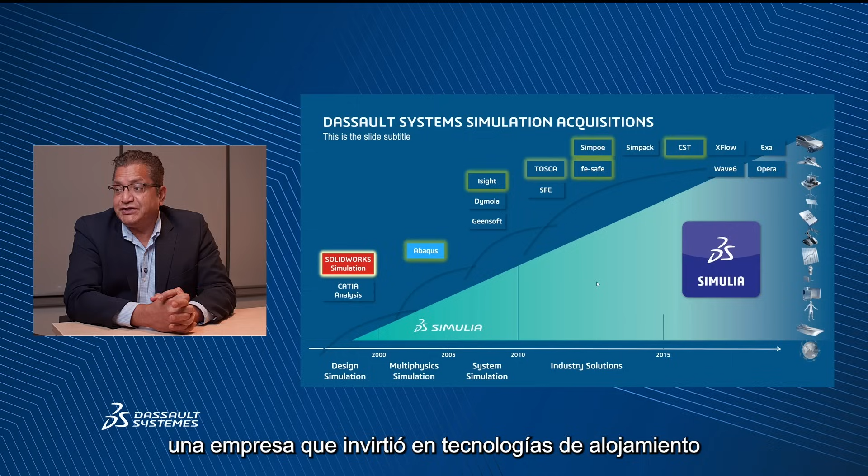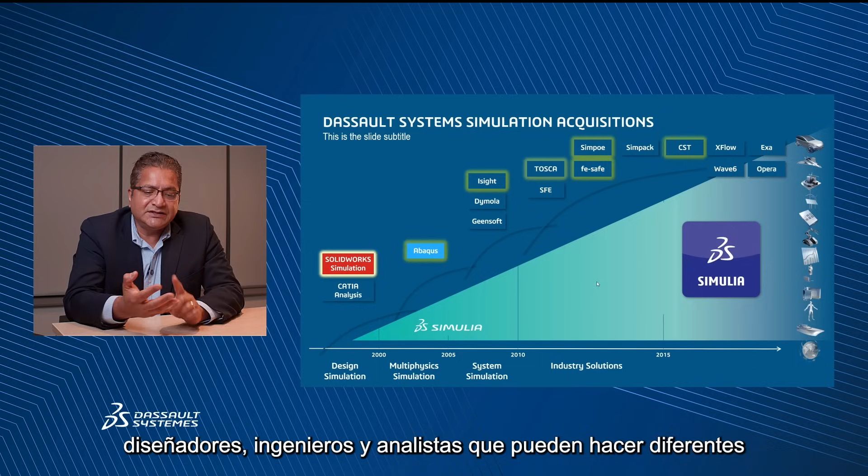If you look at how Dassault Systèmes as a company has invested in acquisitions of simulation technology over the years, it started all with SolidWorks Simulation, CATIA Analysis back in the year 2000, or even before that. The whole idea was to offer designer level simulation to the CAD base. But over the years, there have been several key acquisitions, such as Abaqus and CST Studio, and the goal was to offer not just designer level simulation, but multi-physics, multi-scalable system level simulations for all user personas, so designers, engineers, and analysts can do the different types of simulations to get the job done.

Now, if you break down our simulation portfolio, it really falls into three simple buckets. The first one is the SolidWorks desktop simulation portfolio, which is geared towards addressing the needs of designers and engineers. With this portfolio, you can solve physics such as motion, rigid body kinematics and dynamics, structural simulation, computational fluid dynamics, and plastics injection molding simulation softwares.

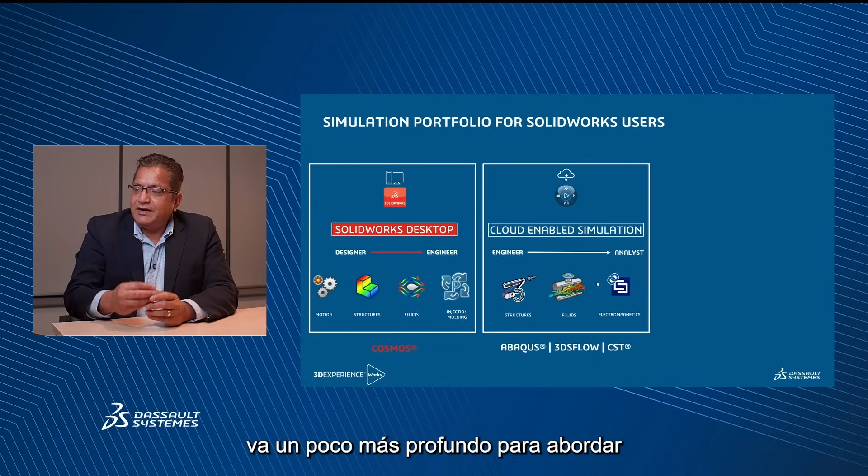We also have the desktop, SIMULIA Desktop, which is Abaqus CAE and CST Studio Suite. So again, if cloud is not an option, you can always access the same technology available on the SIMULIA desktop portfolio.

Let's take a look at SolidWorks Desktop, what it can do real quickly, what it means for designers and engineers to be using SolidWorks simulation.

Now, the first thing is to understand that there are two pillars of SolidWorks Desktop simulation. One is the integration with CAD, which allows you to design and simulate side by side. The other is to actually do design space exploration. As a designer or engineer, you're using SolidWorks to create your designs, but at the same time, you're tasked with getting to the optimal design as quickly as possible.

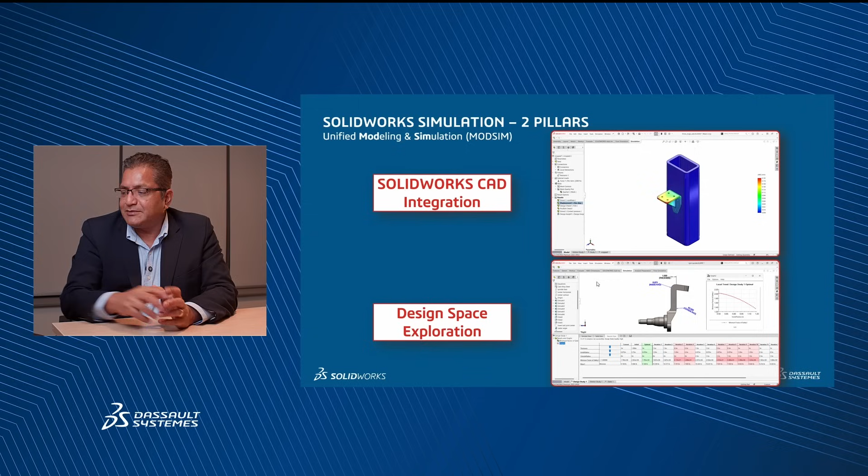So design space exploration, in terms of using optimization tools, can really automate your design iteration process and help you get from a baseline to an optimal design as quickly as possible. Now, these two pillars together help answer that fundamental question: how do we know that we have the best design?

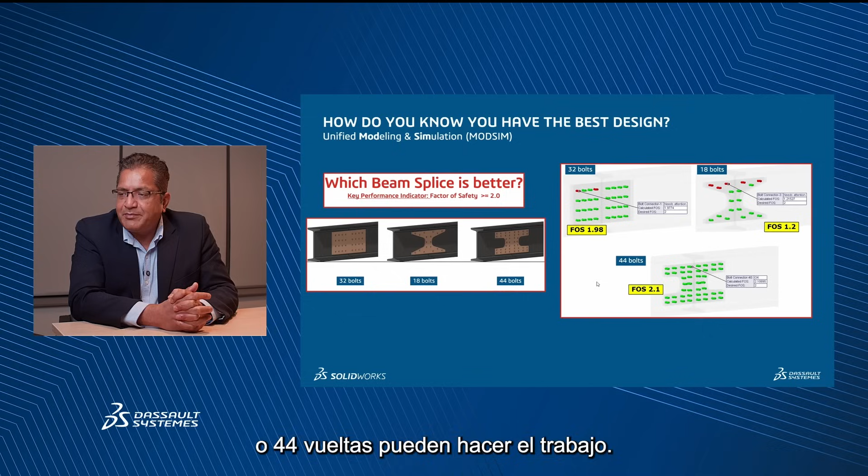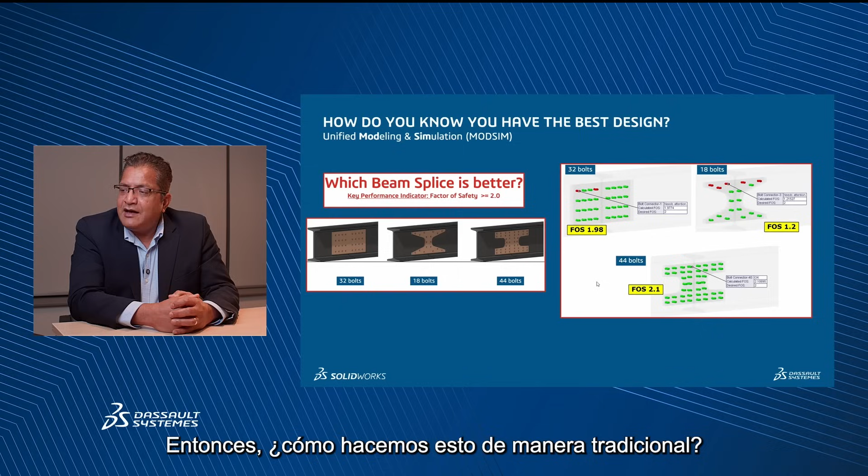So let's take a look at a few examples. This is SolidWorks simulation, an example for beam splice. How do you know, for example, whether 32 bolts, 18 bolts, or 44 bolts can get the job done? Everything's based on a certain criteria we are after. In this case, we're looking at a factor of safety greater than 2.0 in each bolt. So how do we go about doing this in a traditional way?

We would actually make a prototype and test if 32, 18, or 44 bolts will work as expected. But with simulation, we can get the same answers virtually, without making even a single prototype. That's where the beauty of simulation is. In this case, the image on the right shows that the 44 bolt configuration is the one that actually gets the job done, where the factor of safety in each bolt is at least 2.1.

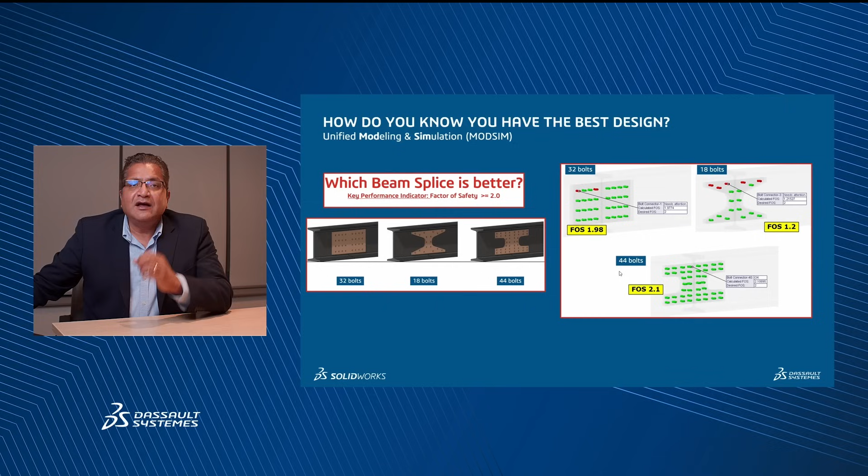So again, the whole idea of using SolidWorks Desktop, which is CAD integrated and a great tool for design space exploration, is to hone in on the best design and test multiple designs, because the more designs you can actually test and simulate, the more data you get on your design's performance, and the more data you get, the better design decisions you can make in the end.

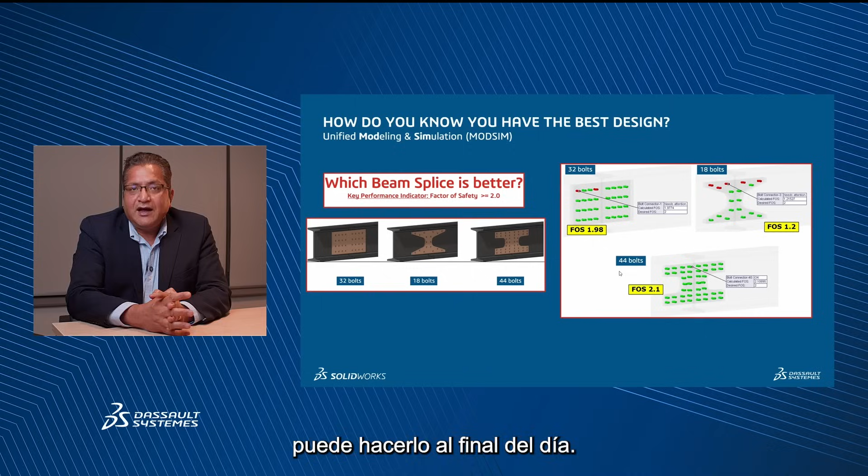If you take a look at different types of physics, like in this piping example, we're looking at a long pipe, a short pipe, or a short pipe with Vortabs. How do we know which is the best design? Well, what we know is from a system requirement, we want to get equal flow rates on either side of the outlet. The fluid comes in from the left side, entering the pipe, then splits on the right hand into two different outlets. So we want to accomplish equal flow rates on both ends. How do we go about doing that?

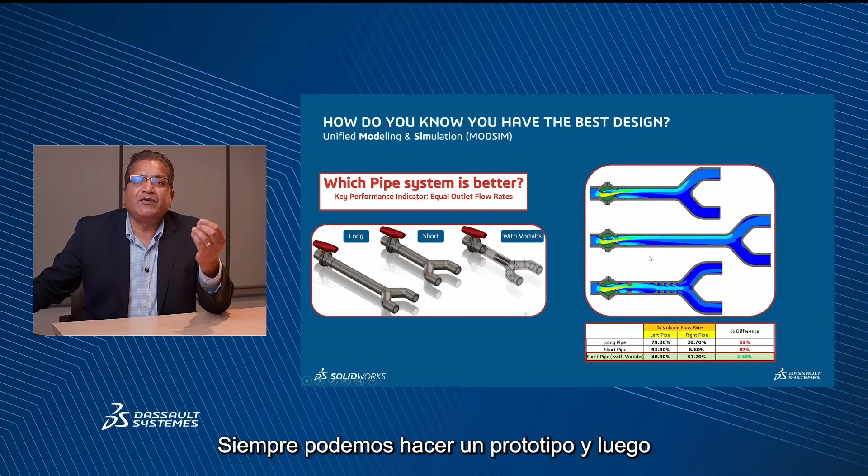Well, simulation is the key. What's the other option? We can always make a prototype and test it to see if we're getting those equal flow rates, but it's going to cost you a lot of time and money. So the beauty of simulation is to analyze these three different designs and see which design is the best. Obviously, the short pipe with the Vortabs seems to be the best design here, because we're really looking at getting that equal flow rate on either end of the outlets.

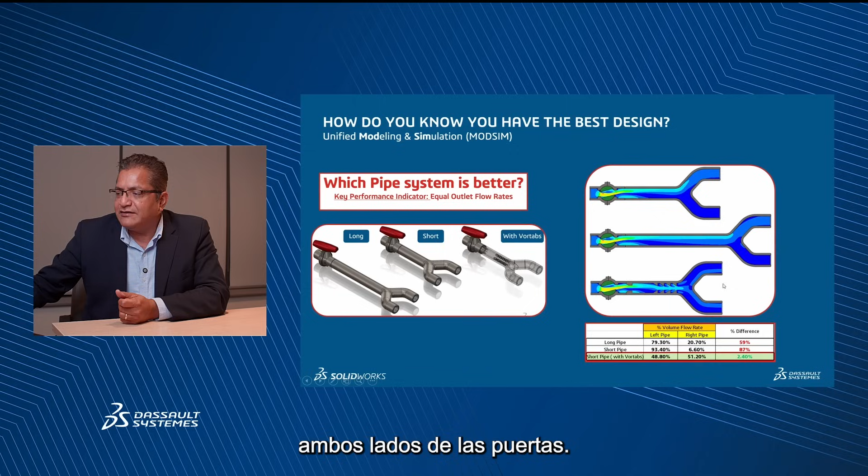Another type of physics is motion simulation. So this is an actuator rack. The vertical rack system is being lifted up through an actuator device, and the question could be: what size actuator do I need to get the job done?

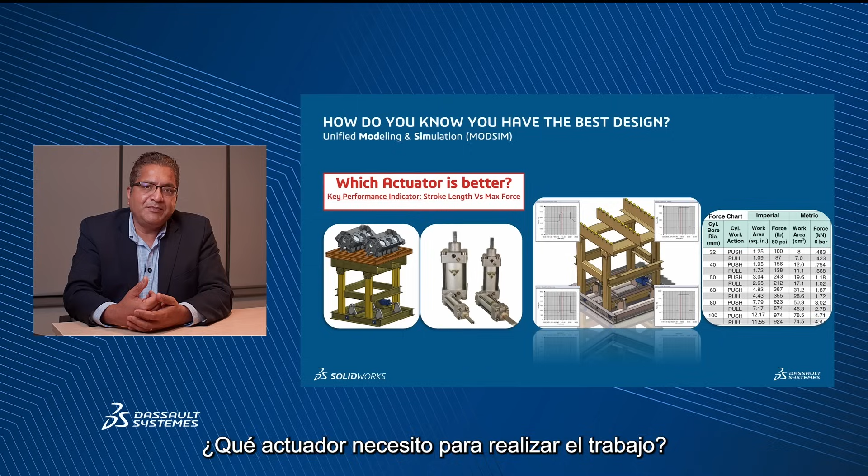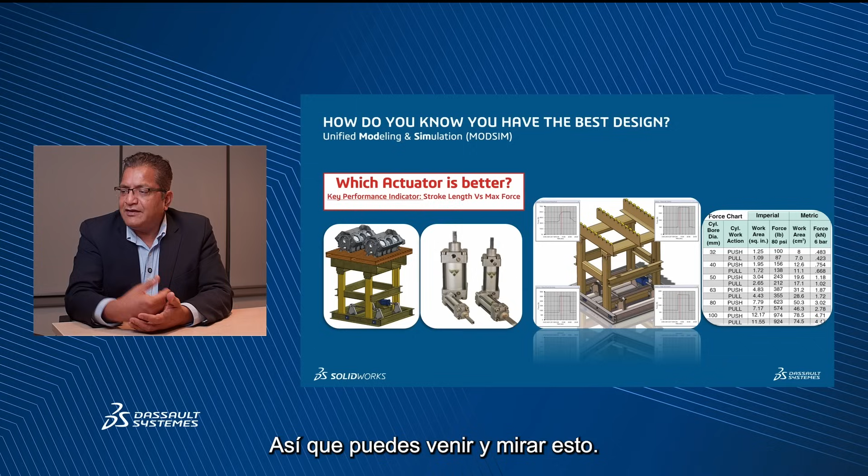Simulation can come in and say, okay, you want to lift it by a certain stroke length, here is the maximum force requirement for the system, and then you can look up this actuator chart to determine what size actuator you need for this particular design of the lifting rack system.

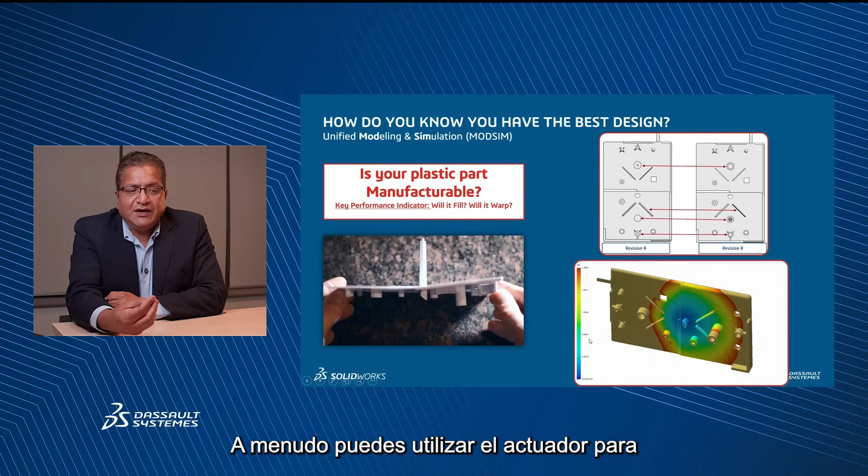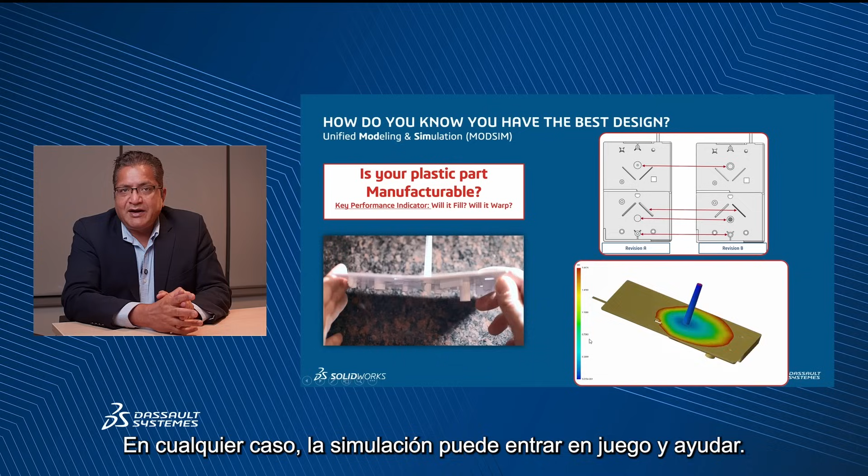And lastly, again, different types of physics. When you're doing injection molding simulation, the key question is: is your plastics part manufacturable? A lot of times you can use the tool to identify key manufacturability issues, such as, is it going to fill in the first place? Is the mold going to fill? Is it going to warp? Is the final manufactured part going to warp? Or is there going to be a lot of volumetric shrinkage that could be more of an aesthetic thing? Whatever the case might be, simulation can actually come in and help you simulate those scenarios without you having to cut metal or make a mold and then test it out in real life.

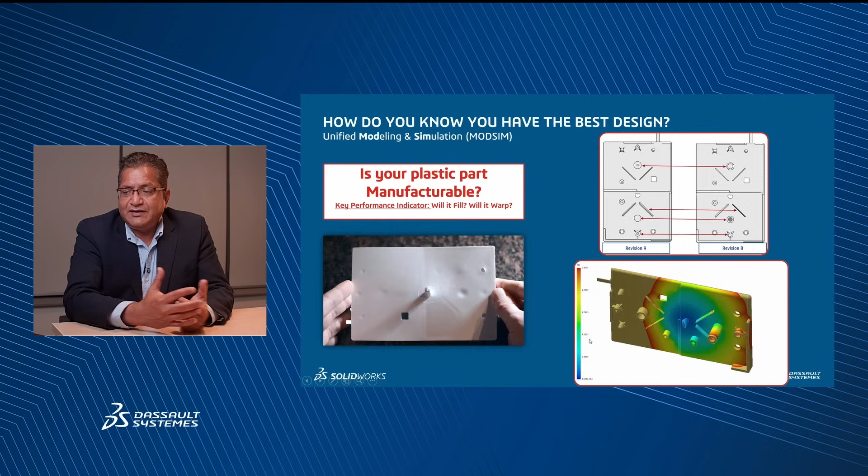So again, we are talking about getting a window inside a mold without even building your injection molding mold. It's a great way to understand what is the best design. If the first design doesn't work, you can make changes and move to design B, and then do the simulation again to see if design B works as expected.

All right, so that is kind of a quick introduction to SolidWorks simulation desktop solutions. Again, very simple to use, different types of physics. The whole idea is to explore multiple designs, analyze the physics, and see what the best design is you want to go with at the end of the day.

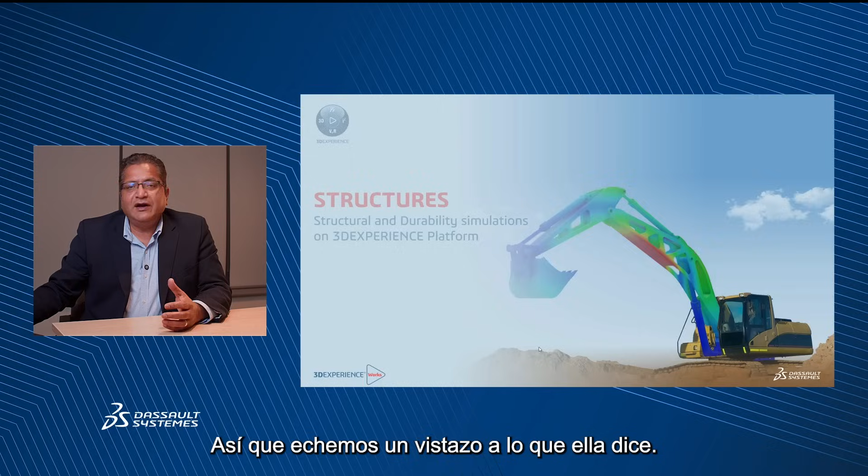Let's talk a little bit about Abaqus, our cloud-enabled simulation. As you all know, Abaqus is the renowned world leader when it comes to structural simulation. So let's take a look at what it can do with structures and durability simulations.

So the first thing to note is it's an industry leading solver. This video illustrates, or speaks for itself. You can see all the high-end application simulations that we can do with the Abaqus solver, and even manufacturability simulations such as blow molding simulation, thermoforming simulations, and a lot more.

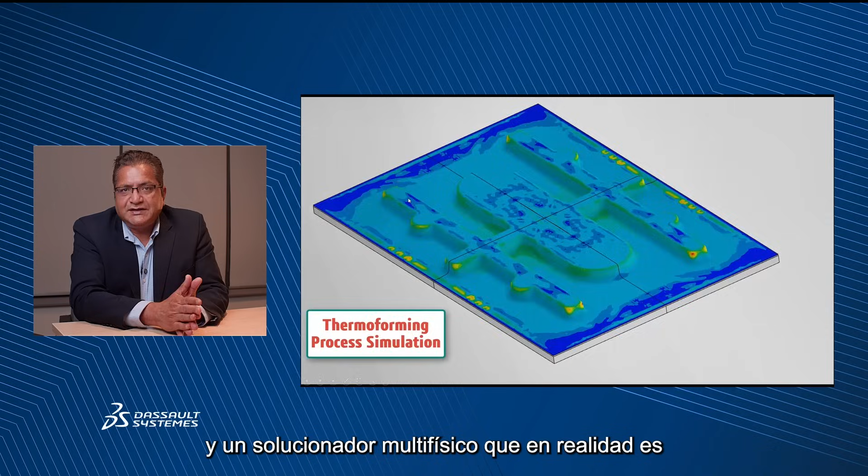Abaqus is an FEA and multi-physics solver, which is used across a wide variety of industries to solve from simple to very complex types of applications. And you can see that this set of videos clearly illustrates some very complex multi-physics applications.

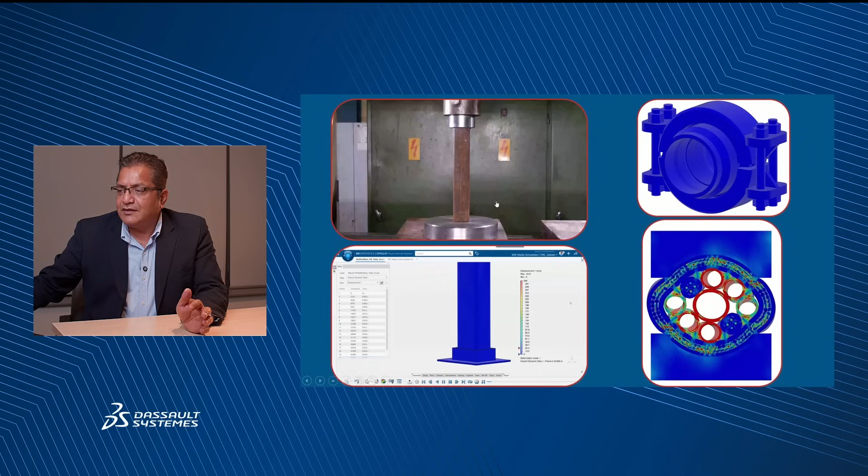Okay, what else can we do with Abaqus? Well, it's a powerful nonlinear analysis tool. Some of the applications illustrated here clearly show the power of a column actually buckling and folding up on itself. That's very complex physics, even though it looks pretty straightforward.

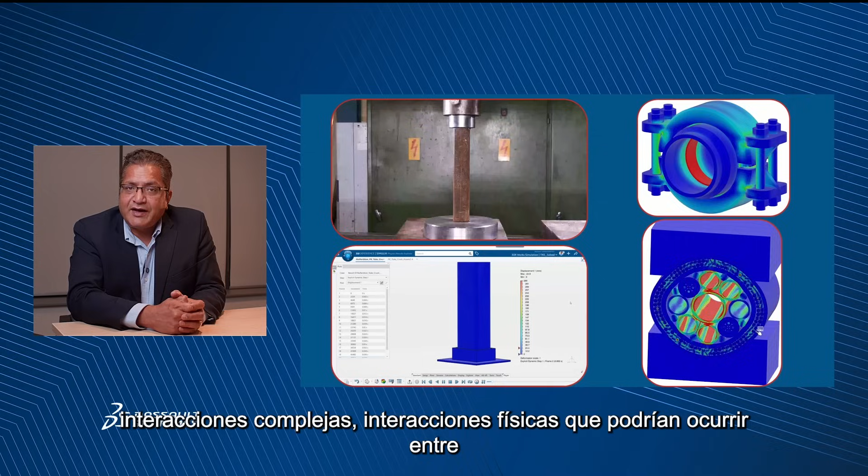There's so much physics going on, and you can see some of the other applications which I really like. The one on the lower right side, you can see it's an umbilical type of scenario where there's a lot of contacts going on, and that's what Abaqus is really powerful about—simulating these types of contacts. We don't have to, as a user, define those contacts up front or do guesswork. Abaqus has generalized contact, where we just turn on the general contact, and all these complex physical interactions that could take place between multiple parts of the assembly are all taken care of. It's a super easy and intuitive way to simulate something complex when it comes to contacts.

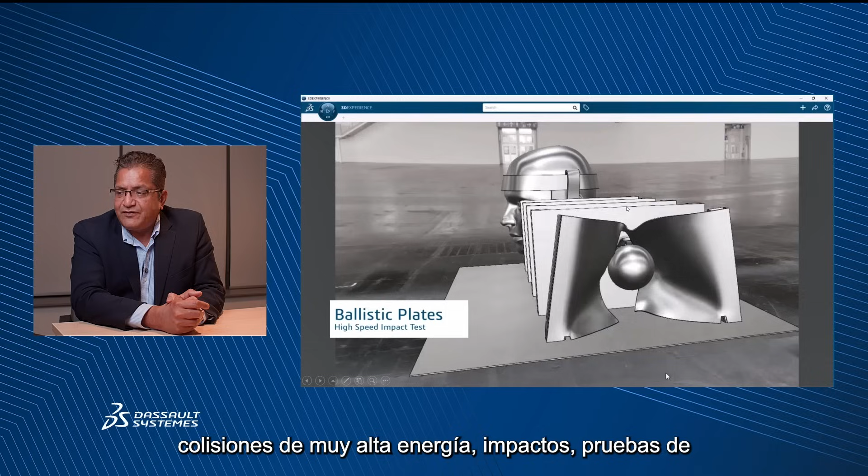All right, how about explicit analysis? A lot of times you have very fast dynamic events that you need to capture with simulation. You can see examples, some very high energy collisions, impact, drop tests. This requires the use of what we call an explicit solver. You can even take an entire assembly and put it through an explicit solver. You can do a car crash, which is a very highly dynamic event. These examples just illustrate how you can use Abaqus to solve various kinds of nonlinear and also explicit simulations, as illustrated here.

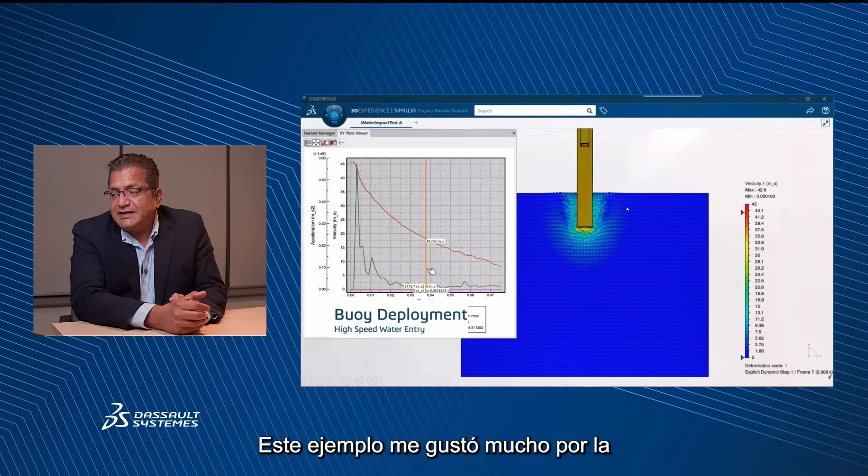All right, so I like this example because now we are talking about using a combination of fluids and structures. If you want to see the effect of the fluid on the structure, but you don't care about the fluid itself, more the impact on the structure, you can actually use Abaqus to simulate that—doing a structural simulation where you're now introducing fluid interaction as well. So I'll replay this video so you can clearly see what I was talking about before.

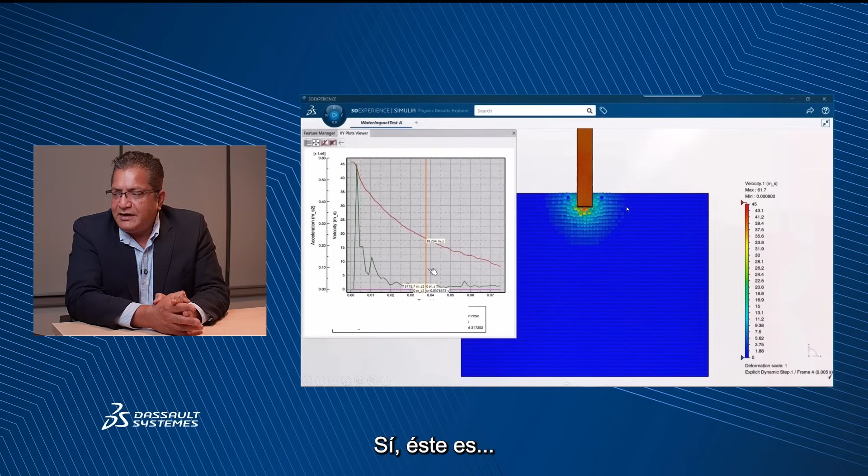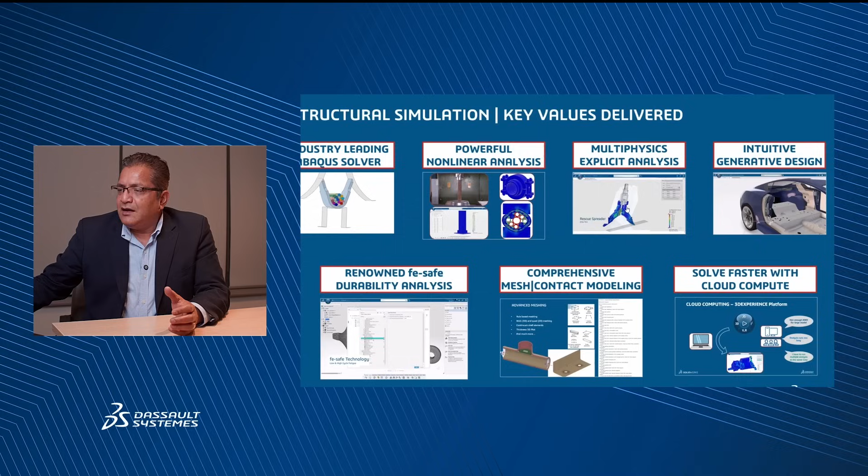I don't want to spend time going through every single one of these functionalities, but these are basically the broad level functionalities that we get with Abaqus.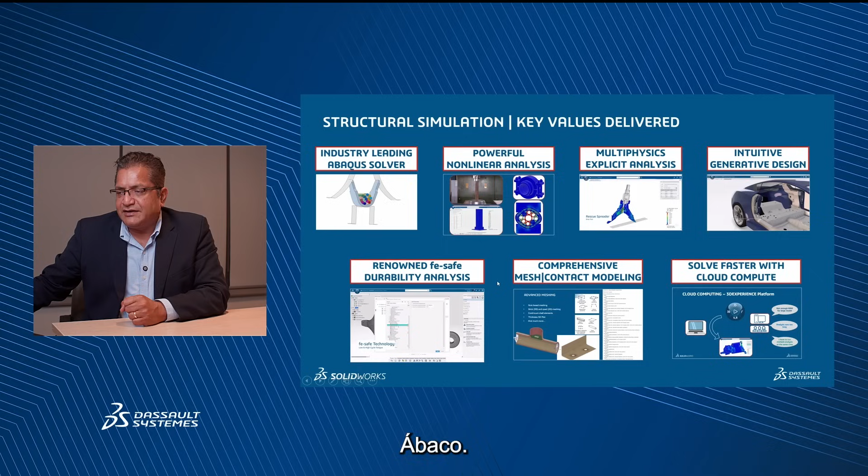FE-safe analysis for durability, which is a great way to simulate high cycle fatigue, maybe even low cycle fatigue, or even weld fatigue.

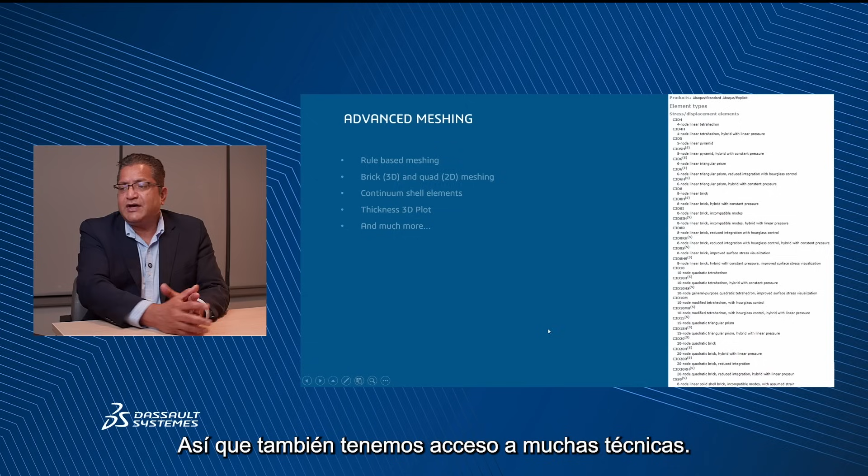We do have comprehensive meshing techniques. We also have access to a lot of meshing techniques as well as contact techniques. Here you can see a lot of different options available for creating your meshes, but also controlling the element formulations of these meshes.

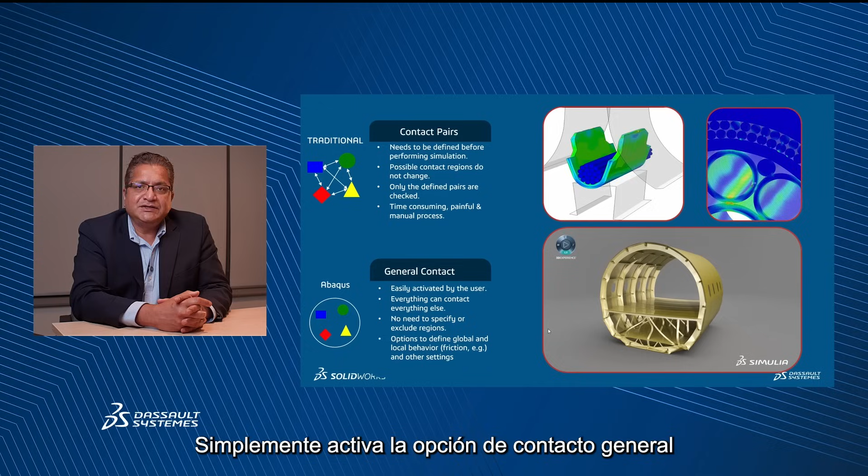Here is an example of general contact. In traditional contact, we have to do a guesswork and specify upfront how the contacts are actually defined. But with Abaqus general contact, you don't have to literally do anything. You just turn on the general contact option and the program takes care of all the physical interactions. That's how powerful it is.

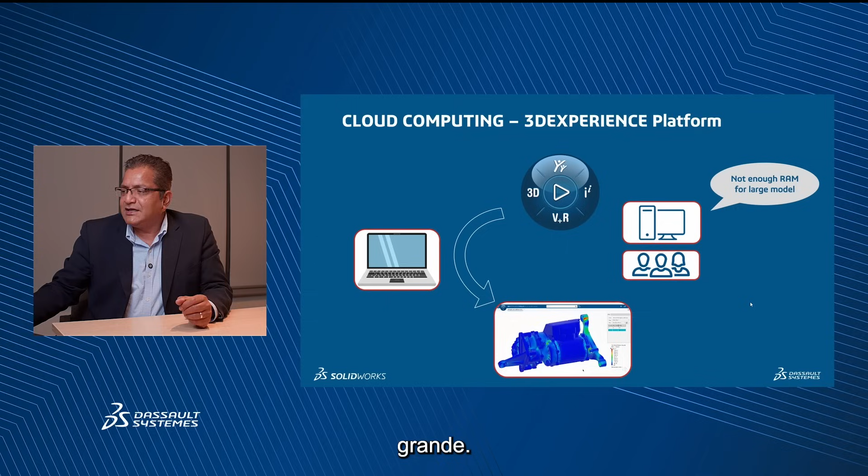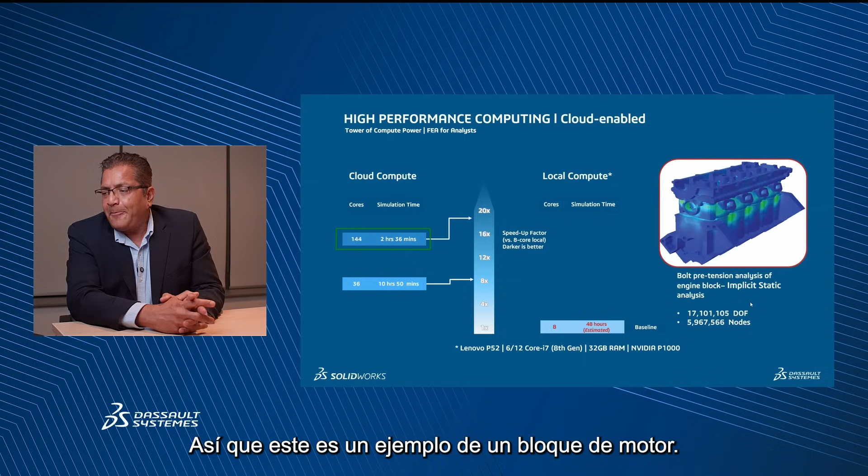One of the things you get access to is HPC, cloud compute, or even local compute. A lot of times as engineers and analysts, we know that RAM is never enough for large models. We also know that analysis takes way too long to run, and you need to run multiple complex analyses at the same time. So with Abaqus on the cloud, we're talking about supporting the HPC infrastructure where the solver is actually scaling with more cores. This example of an engine block is about 17 million degrees of freedom.

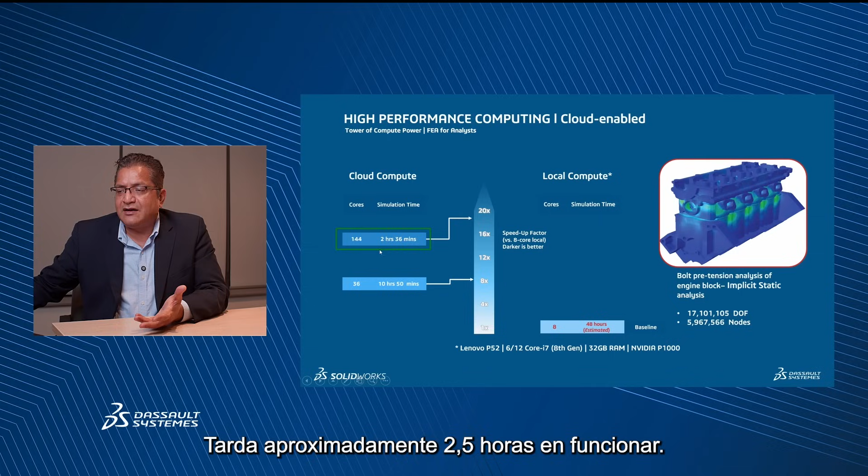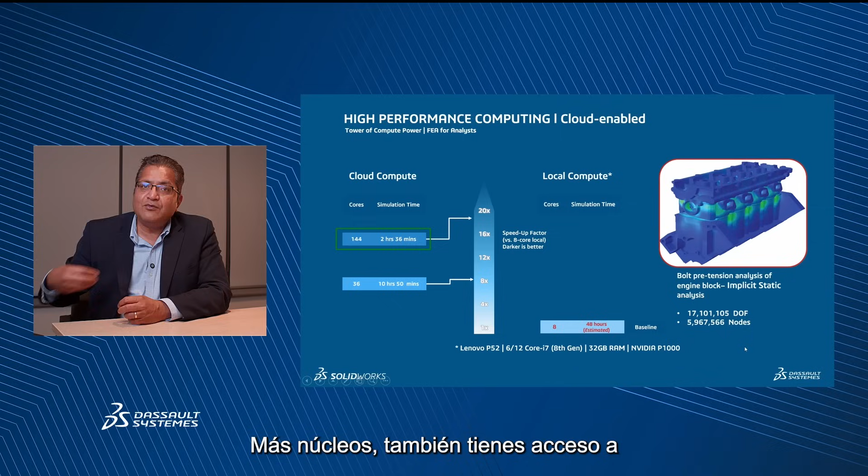Using a local machine, it takes about 48 hours to solve this problem using 8 cores. As you throw this problem onto the cloud with more cores, say 36 cores, it takes about 10 hours to run. 144 cores takes about 2.5 hours. So you can see almost a 20x improvement in solve times. Something that takes 2 days now takes about a couple of hours. That's the beauty of leveraging a solver that scales when you throw more cores at it. You also get access to more RAM to solve the same problem, but end of the day, we're talking about a faster turnaround in productivity for solve times.

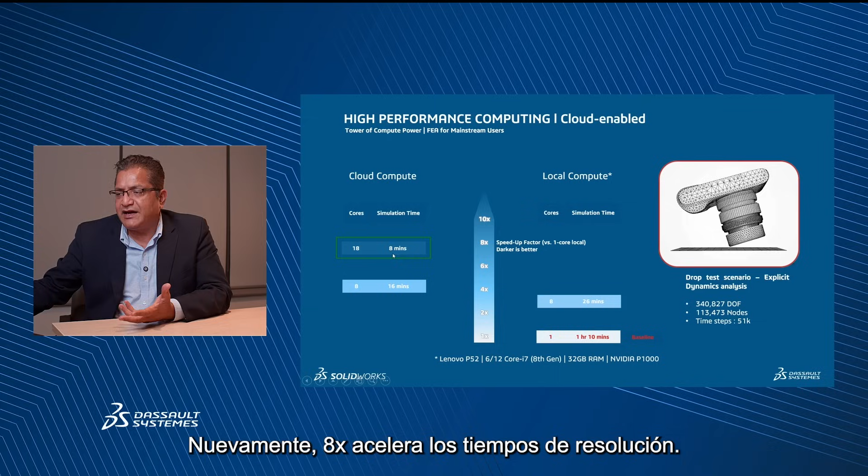Here is another example, a drop test on a camera. With 1 core, it takes about an hour and 10 minutes to solve. With 18 cores, it just takes 8 minutes, an 8x speedup on solve times. Again, just another example of how you can leverage multiple cores using the Abaqus solver and get your problems solved much faster.

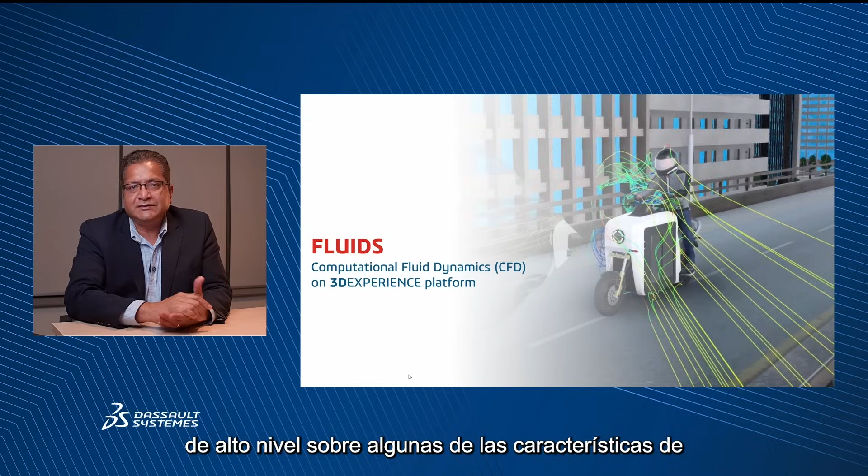All right, so that is kind of the structural portion of our simulation. Let's move on to fluids. I want to give you a high-level overview of some of the key features of the computational fluid dynamics tool, and let's go to the first.

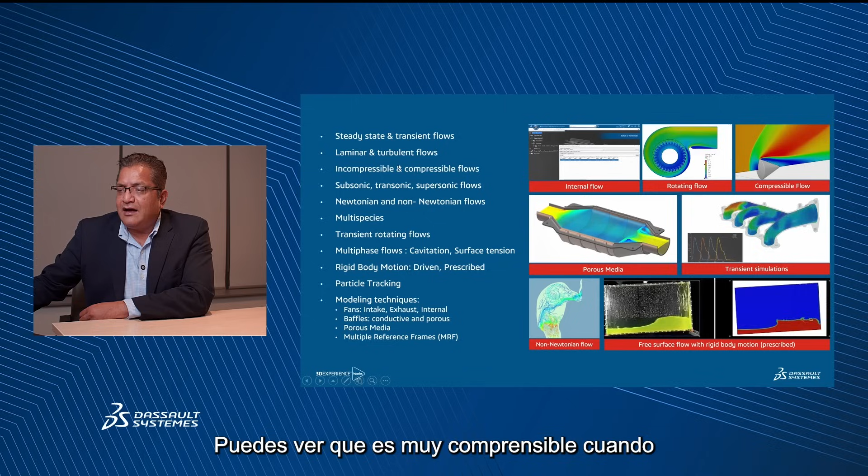I want to talk about comprehensive capabilities. Here we're talking about fluid flow software, but we're looking at steady-state, transient, laminar, turbulent flows. I'm not going to read everything verbatim, but you can see it's very comprehensive when it comes to capabilities, including something called mesh motion or rigid body motion, which is a great tool to use in fluid dynamics, especially when you have any kind of motion within the fluid.

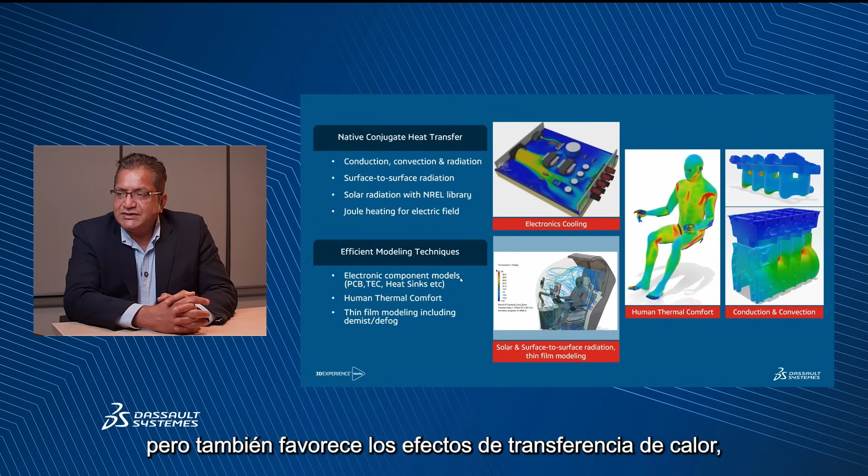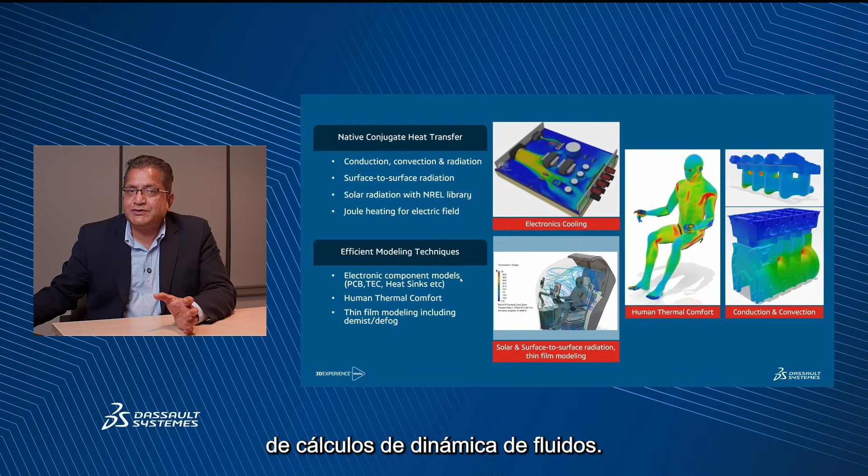So again, it's not just fluid flow, but it also supports heat transfer effects such as conduction, convection, radiation, and there are different electronic component support such as PCB, heat sinks, TEC, joule heating, and so on. So it's a full solution when it comes to computational fluid dynamics. Fluid flow plus heat transfer effects can all be simulated with this tool.

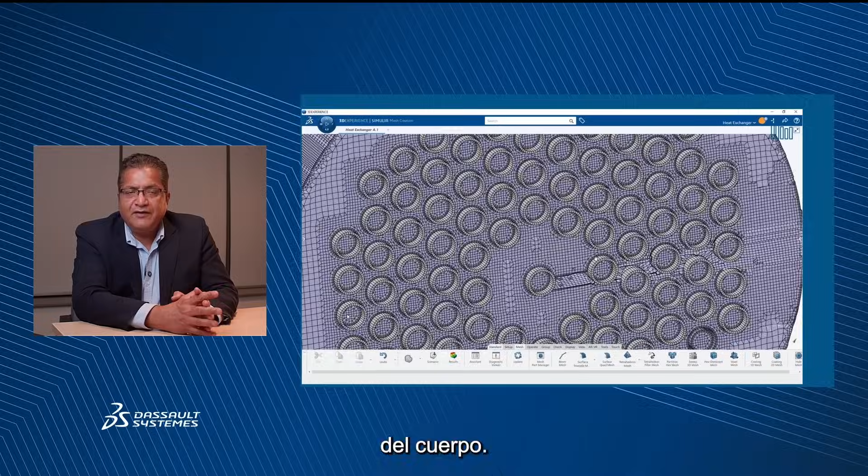One of the things I like about this tool is it's called body-fitted meshing technique. It's a great way to mesh the geometry, the solid volume, the fluid volume, and also control the boundary layer meshing. Here, for example, we're using a hex mesh to mesh the volume of the fluid, and you can clearly see the boundary layers that you can control. You can specify how many boundary layers you need, what is the size of the first characteristic boundary layer, and so on. With this tool, you have full control over meshing and boundary layer meshing, as well as access to many different types of meshing techniques to mesh your fluid volumes.

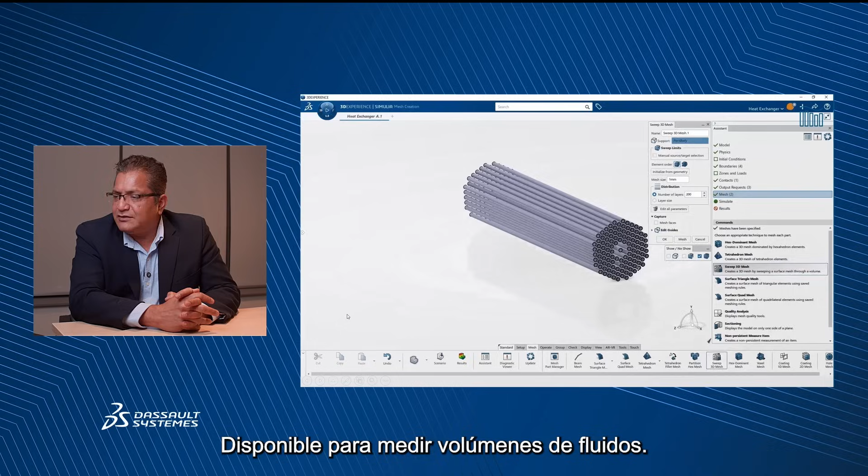One of the other aspects of this fluid solution is that it offers advanced turbulence modeling techniques. It has SST K omega, which is great for internal flows and thermal external flows. It also has realizable K epsilon for most internal flows and thermal problems, and Spalart-Allmaras for external aerodynamics. One of the things that's also supported with these three turbulence models is intelligent near wall modeling.

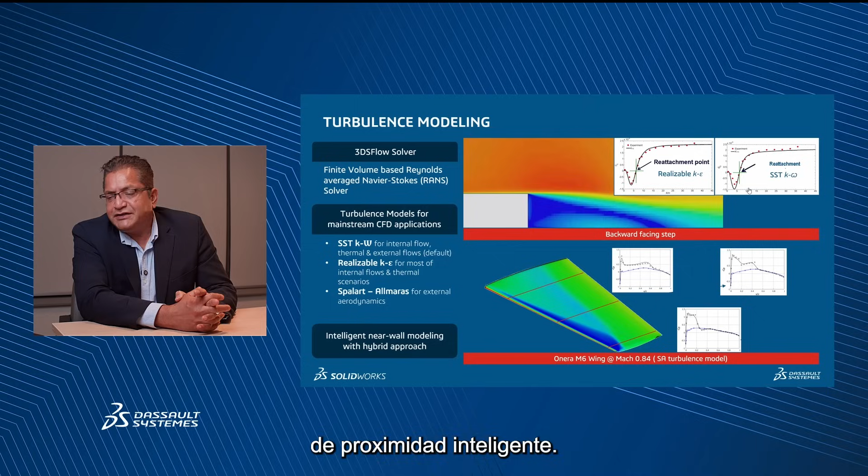What that means is that depending upon the coarseness of the mesh, the actual physics is solved in the boundary layer, without making approximations with the wall functions. We don't specify that as a user - the solver automatically picks the best methodology based on the mesh coarseness near the walls.

Of course, like we talked about cloud computers with structural simulations, the same is available for computational fluid dynamics with this fluids tool.

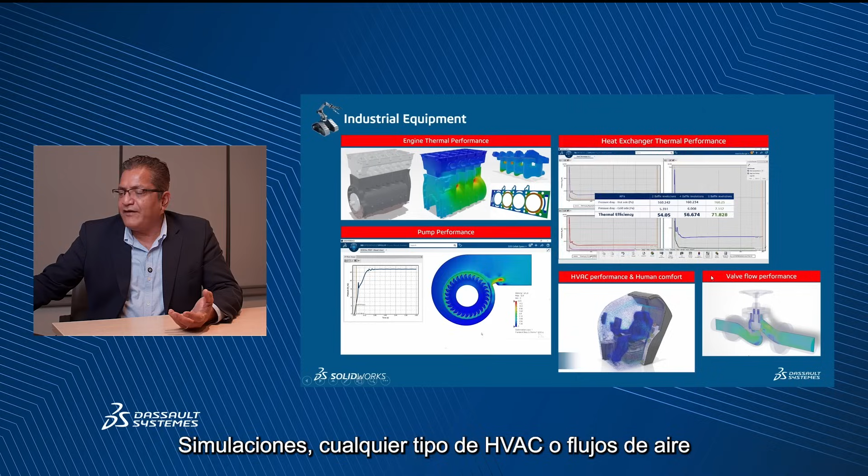Just real quick, what you can do in terms of applications, when it comes to industrial equipment, you can see some examples of engine thermal performance, pump performance. We can predict and derive pump curves from the simulations, any kind of HVAC or valve flows - we can easily do that with this particular tool.

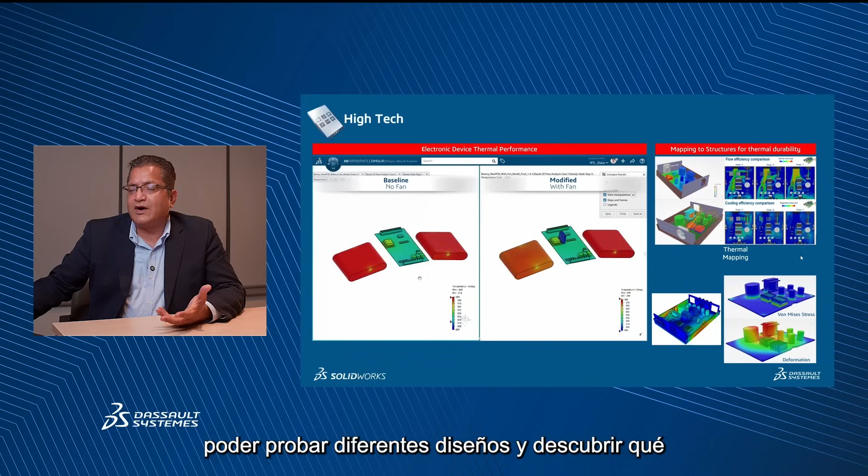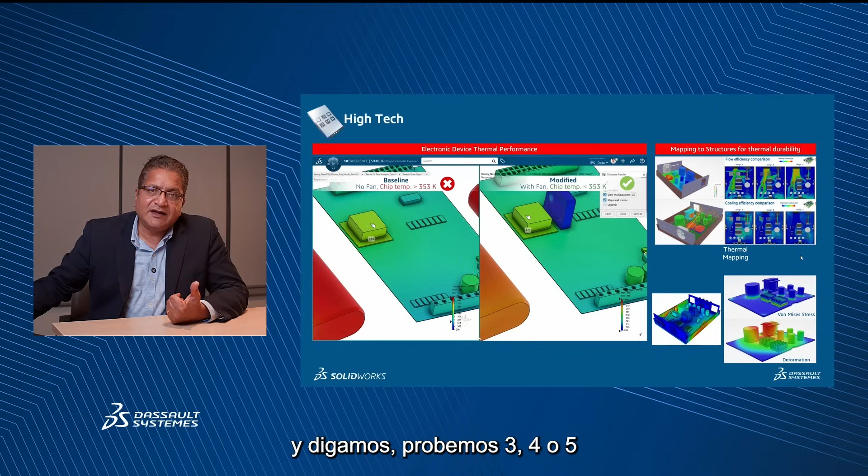When it comes to high-tech electronics applications, you can not only simulate the fluid flow, in this case airflow, but also optimize the fluid flow patterns, airflow patterns, testing multiple designs to find out what happens if you use a fan, if you don't use a fan, what happens if you use 10 fans. Obviously it's going to make a lot of noise, but is that going to keep the system cool? Absolutely, but the added noise may not be an advantage, so you can scale back and test maybe 3 or 4 or 5 fans instead.

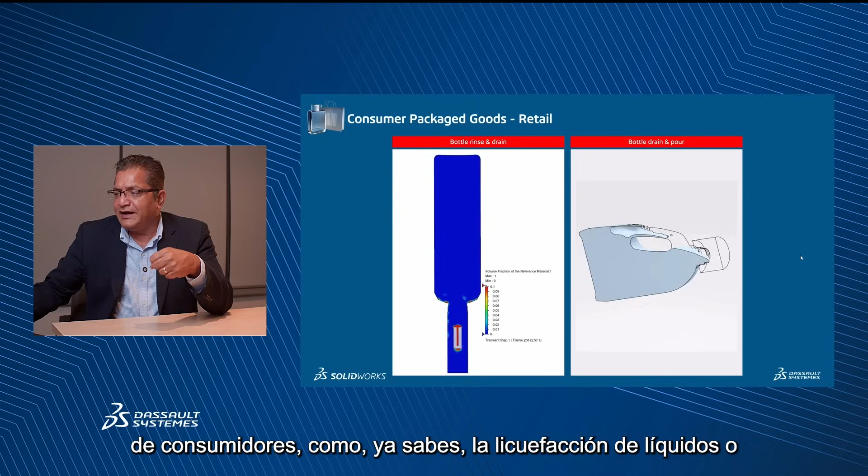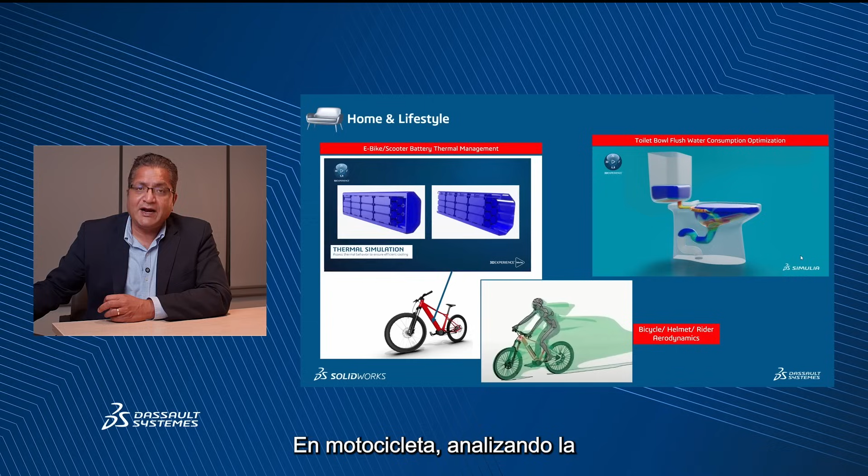This is another example of home and lifestyle, but this is more of an e-bike example. Analyzing the battery pack is really critical, right? You want to make sure that the battery pack module is kept cool at all times - it's not a safety hazard where it overheats and possibly explodes. So we want to make sure we can do battery thermal management as well, and this tool allows you to do that.

On the upper right side, you can see an example of a VOF application, which is simulating the interface between - it's a flush valve flushing example - but it clearly shows that it is a very complex type of physics where we are modeling both air and water, accounting for the interface and surface tension effects between the two fluids of different types.

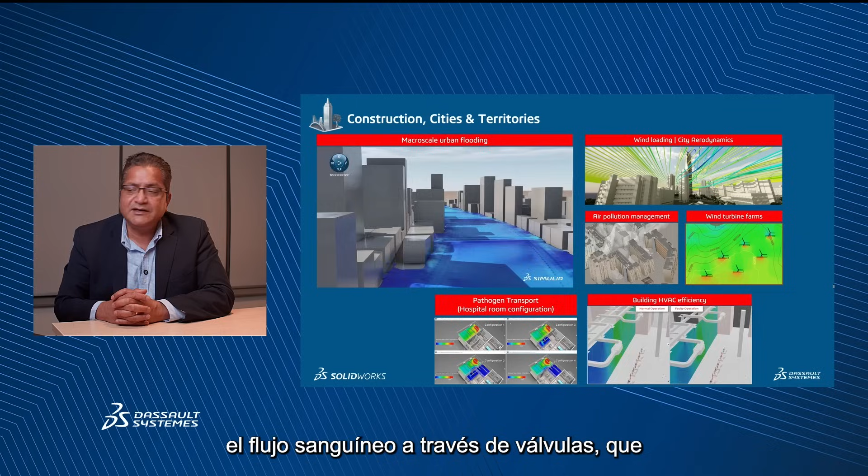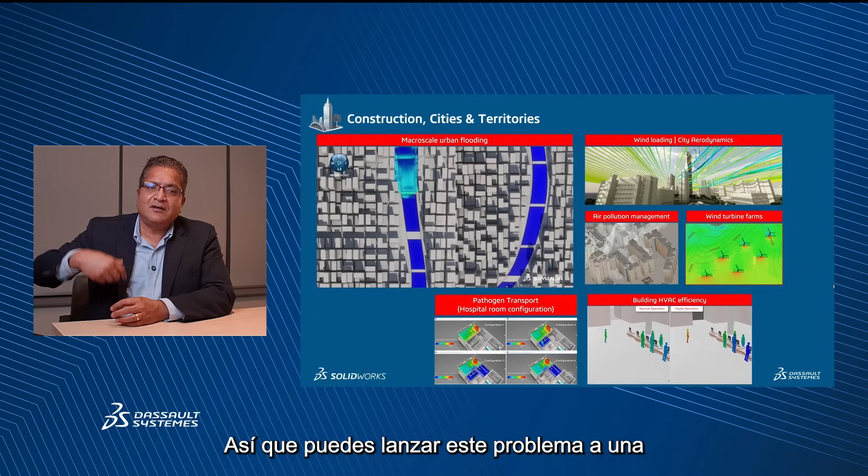This is a little bit larger - when it comes to construction, cities and territories, we're talking about very large scale problems. This tool, called Fluid Dynamics Engineer, is great for capturing these large scale problems, because it offers support of multiple cores. So you can throw this problem on a 144 core machine or a cloud solve, and run these problems much faster today.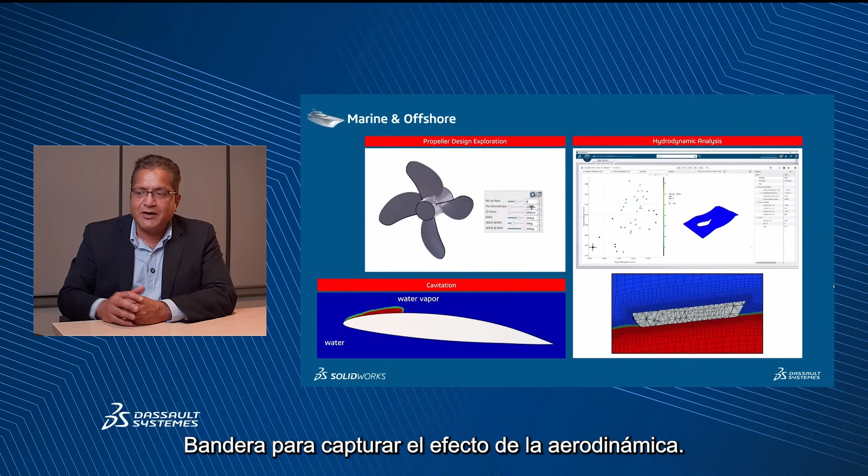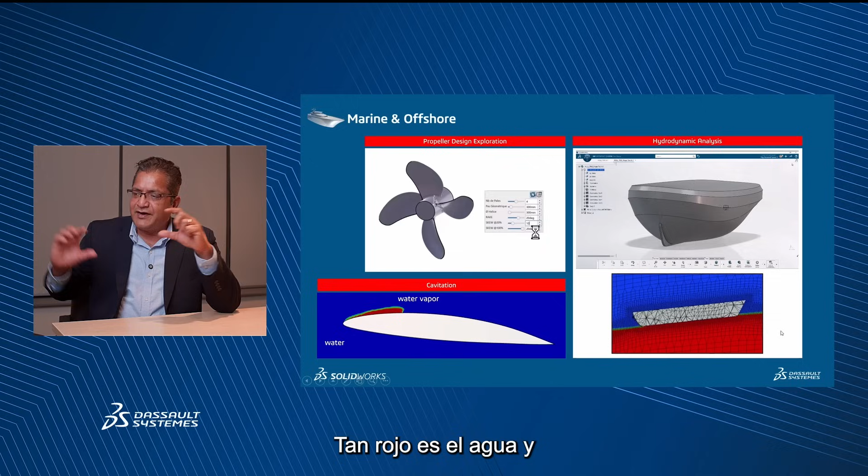These are just some other examples from marine and offshore, where we're talking about being able to control fluid flow around objects, but again, it makes a lot of sense to have a good measure on the boundary layer to capture the aerodynamic effect. The one on the bottom right side, you can see it's just an object floating on water - the red is actually the water, and the blue part is air.

You can see that you can capture the small displacements, maybe the yaw, pitch, and roll of that object. That's actually simulated by a technique called mesh motion, where we are simulating the rigid body motion of this object, and we can capture the effect of maybe a wave splashing across the object. We want to capture the loads because of that, or maybe you just want to see how the object has what kind of yaw, pitch, and roll. So mesh motion technology is a great way to analyze those rigid body motions combined with fluid flow.

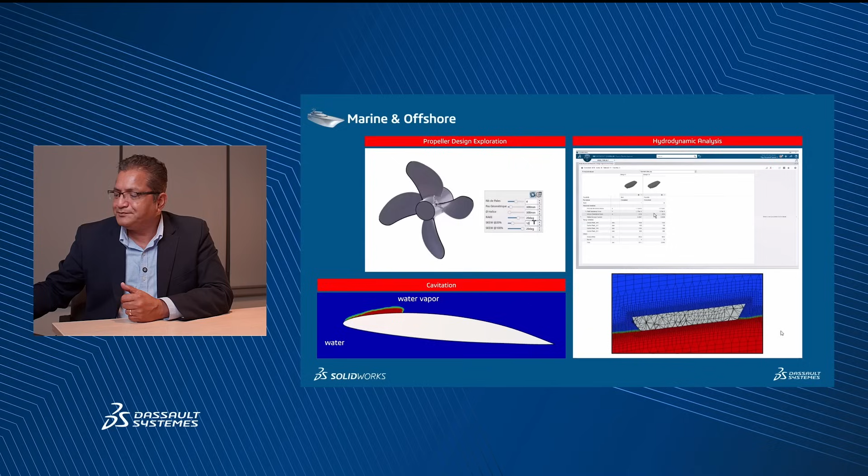All right, so that is a quick introduction to some of the structural applications as well as the fluid applications using Abaqus technology. Let's quickly take a look at one customer success story. Why is simulation important, right?

Caloi is a great customer here in Brazil, and they make a lot of these mountain bikes, road bikes, and now they're also into manufacturing of e-bikes. They're located here in Brazil, but some of the pain points are they have a very aggressive target - we're talking about almost 42 models in 2 years - and they have to satisfy a lot of safety standards. So even though it's just a frame that they're manufacturing, they have to make sure the frame is subjected to drop testing and other types of tests according to the safety standards.

One of the big issues with making different products - different types of frames, very complex, very complicated features - is it takes a long time to make prototypes. It's also not just a long time, but it is very expensive to make a lot of prototypes. But the goal is, how do we lightweight the design? How do we make sure it's strong enough, it's durable enough? So common challenges that you might also be having when you think about your own products resonate across a wide variety of industries and engineering applications.

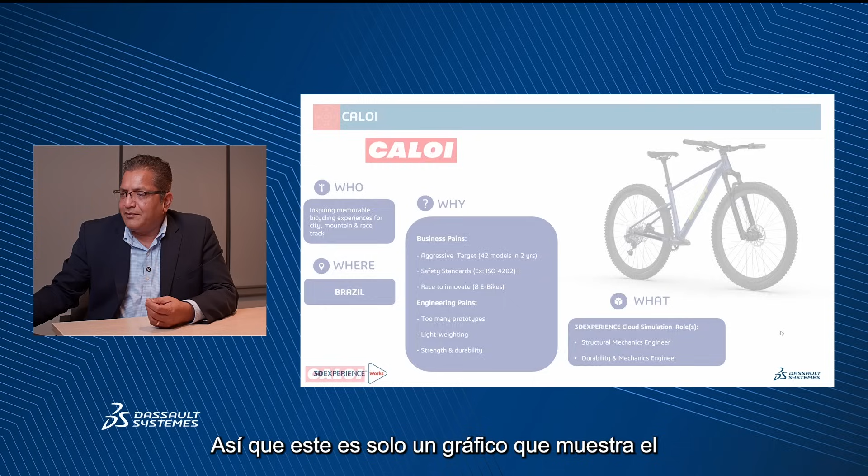So this is just a screenshot showing the different types of testing. They do impact tests for falling mass or falling frame, and they do a lot of fatigue tests. This is showing one example of how the testing is actually done - they drop the weight from a certain height onto the frame and test if the frame can actually withstand that loading. There are a lot of different types of testing they do.

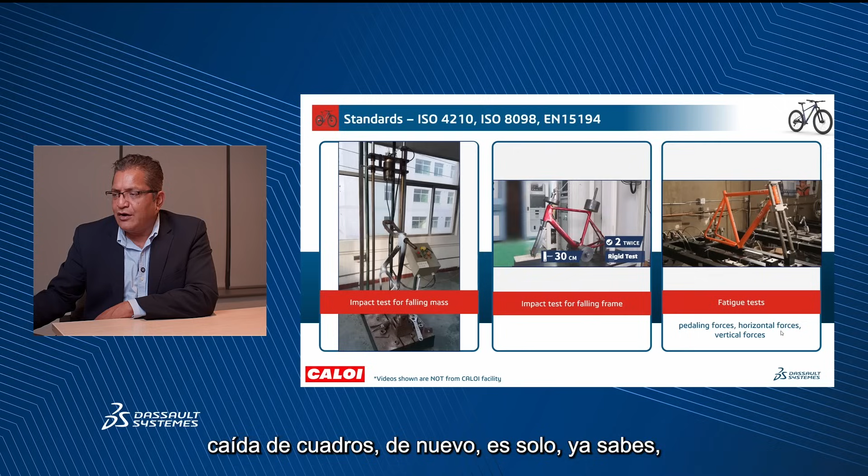The impact test for falling frame is, what if the frame falls from a certain height - what does that actually mean, is it going to break or not? They also do a lot of fatigue testing, which is basically repetitive loading. They're loading the structure, unloading the structure, and they want to see how many times that load comes on and off before the structure or the frame actually fails due to fatigue.

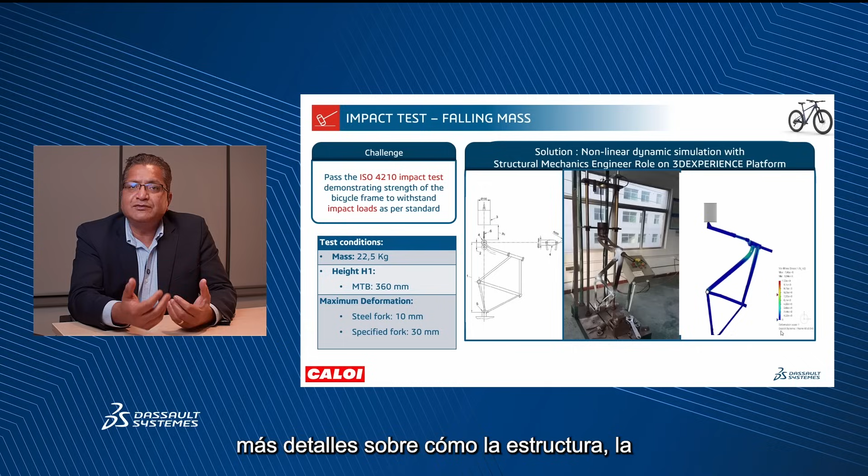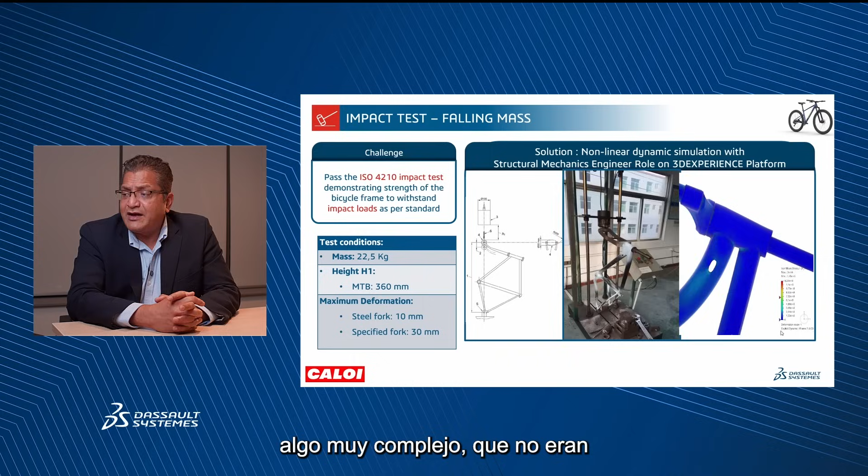One of the biggest challenges that we helped them with is that they wanted to pass the ISO 4210 impact test. This shows a little bit more detail into how the structures tool powered by Abaqus helped them simulate this very easily. When they simulated and saw that the simulation results matched very well with the test results, they were like, yep, this is exactly the return on investment in terms of simulating something very complex, which they were not doing before, but now they were able to gain more confidence in using simulation as a tool to drive their design and decision process.

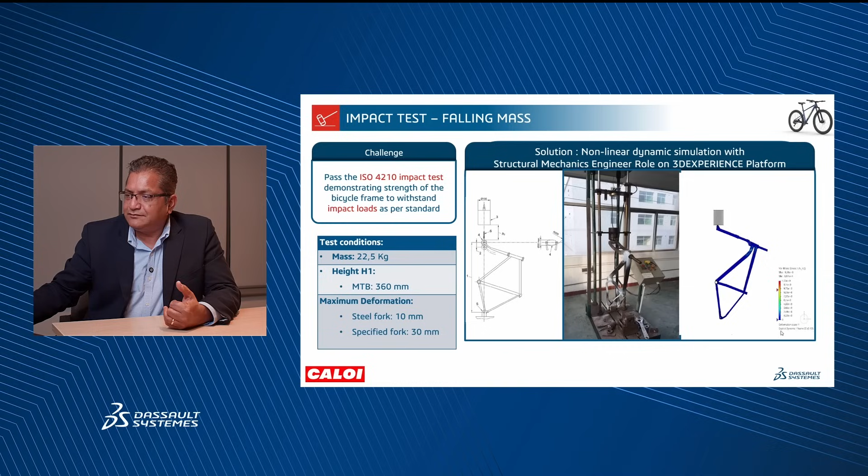So in the end, the outcome was very good - this is another challenge. I'm going to, just in the interest of time, let me just go through this.

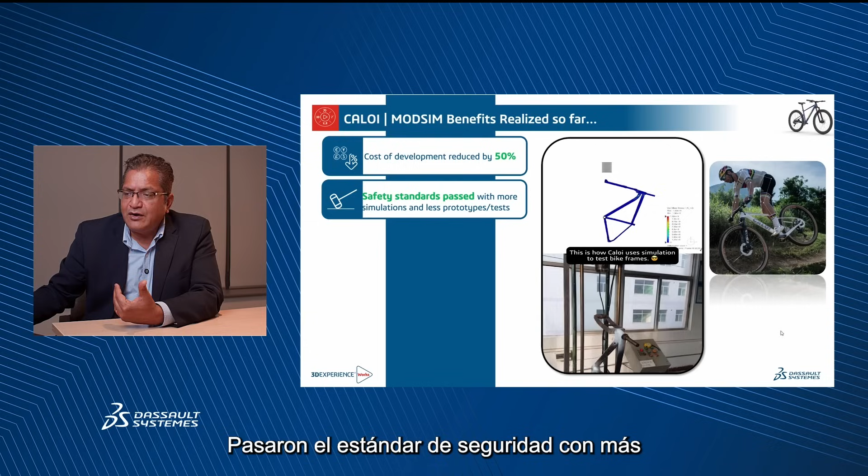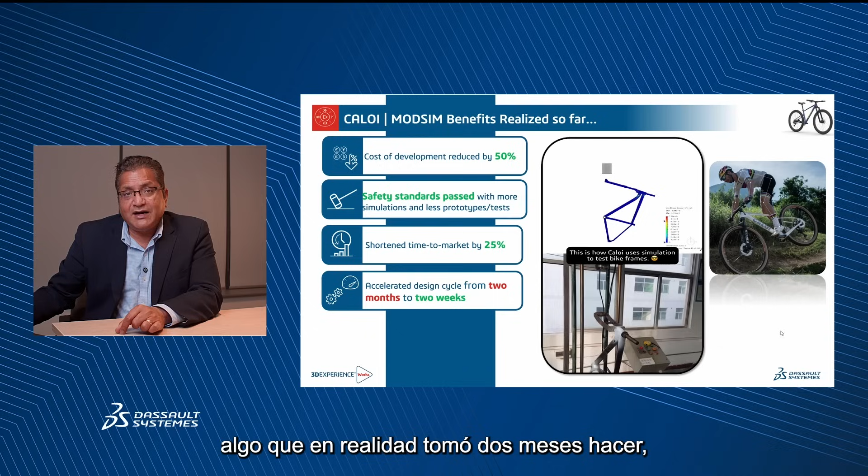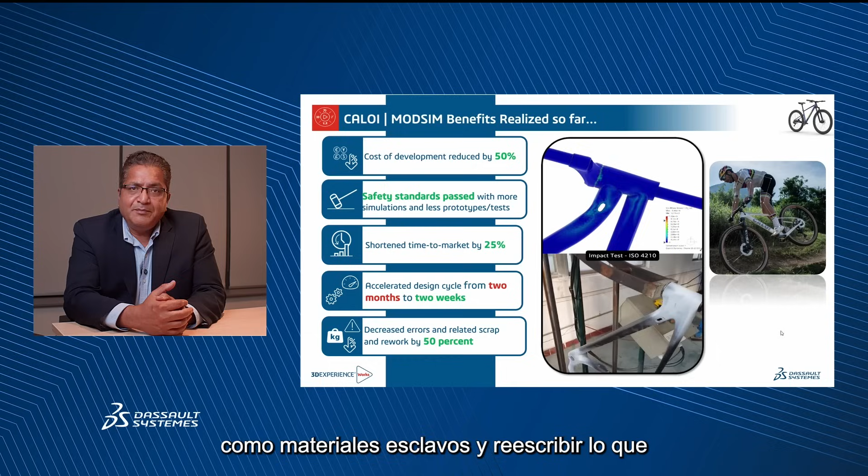For Caloi, the use of simulation and bringing simulation in-house definitely helped with a lot of business benefits. Starting with cost of development was reduced by 50%. They passed the safety standard with more simulations and less prototypes. They were able to accelerate the time to market by about 25%, which means something, because in today's market everybody's competitive, everybody's trying to get to markets faster. Simulation is one of the great tools to use to get your products out to market much faster. And what is nice is something that actually took them 2 months to do now is taking only 2 weeks to do - a huge turnaround in productivity when it comes to using simulation. A lot of the issues they were facing before, like scrap material and rework being done on the designs, they were able to identify, reduce, and fix that effort by almost 50%.